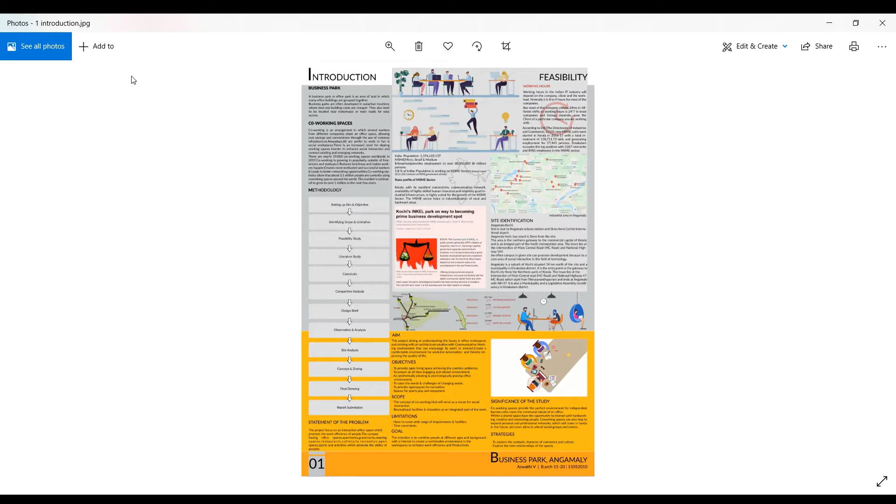Business park is an area of land in which many office buildings are grouped together. Business parks are often developed in suburban locations where land and building costs are cheaper, or places with easy access or transportation facilities.

Business park has great importance today because in India, 4 million people are working in IT sectors directly and indirectly, providing employment to more than 10 million people. The IT sector contributes 7.7% to India's GDP. 8 million people work in MSME sectors and most companies operate 24 by 7 in different shifts.

People working in IT professions are spending most of their time in offices.

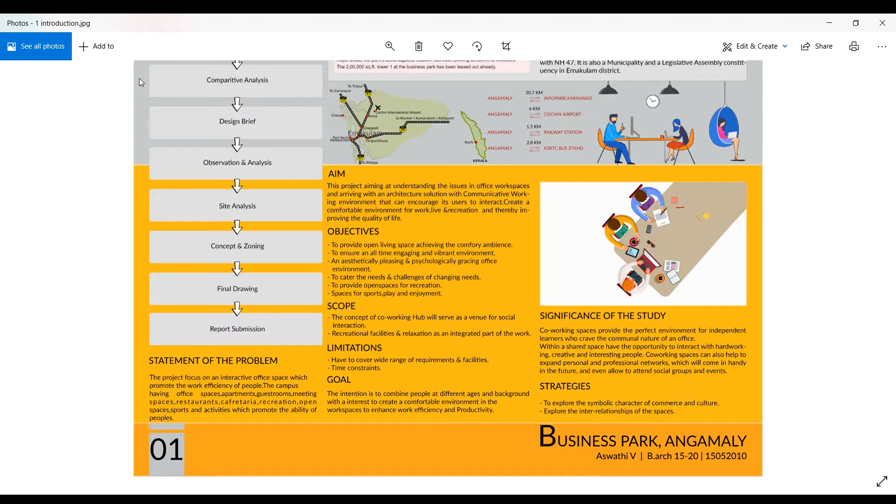This project aims at understanding the issues in office workspaces and arriving at an architectural solution with a communicative working environment that can encourage its users to interact, create a comfortable environment for work, live and recreation, and thereby improve the quality of life. The project is a live proposal for a business park in Angamaly by the state government for the development of the commercial sector.

The case studies I did are Titan Integrity Campus at Bengaluru and Lulu Cyber Tower 2 at Kakkanad as live case studies, and Suzlon One Earth at Pune and Googleplex California as literature case studies.

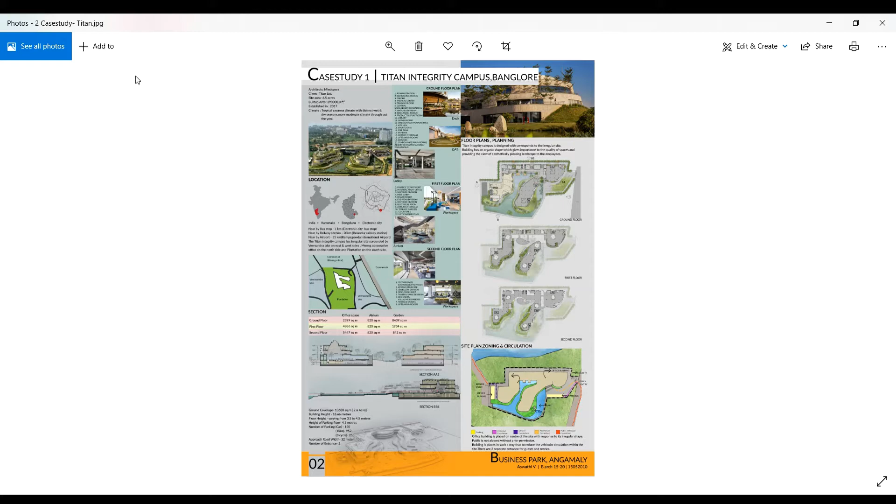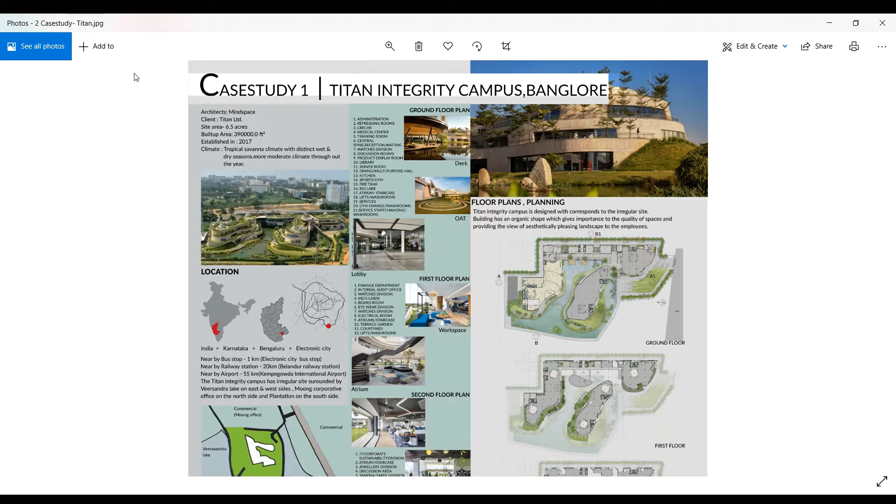Titan Integrity Campus is a three-story office building by Titan Limited with a total built-up area of 390,000 square feet in 6.5 acres, situated in Electronic City, Bengaluru. The main attraction of the project is the planning of office spaces on an irregular site with respect to nature, landscape and water body. The building is designed so that every floor has a terrace garden, with an atrium provided between office spaces for enough daylighting in interiors.

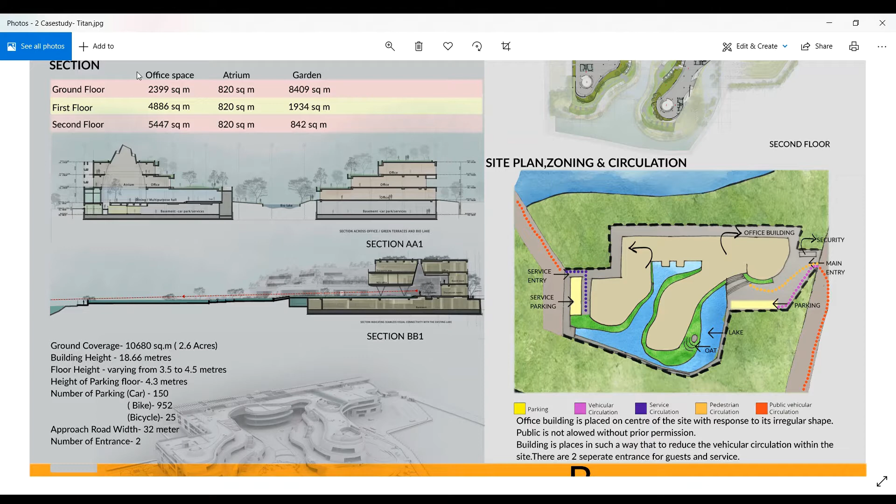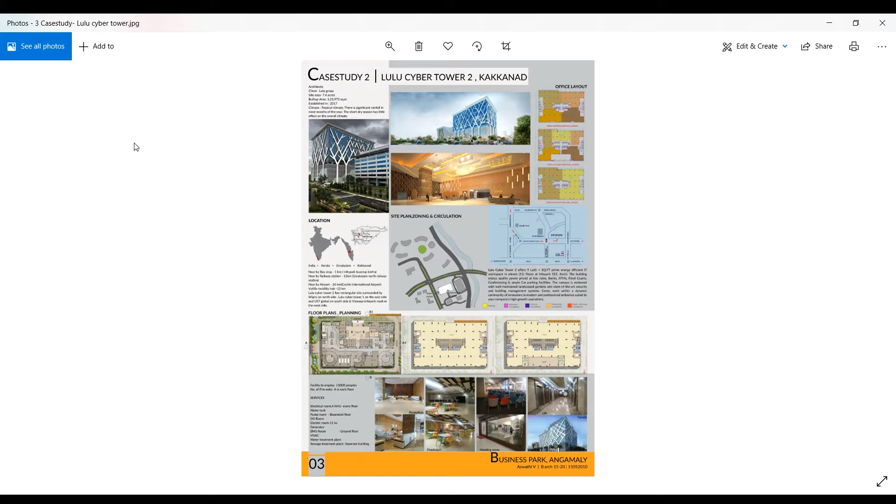The next one is Lulu Cyber Tower at Kakkanad. Lulu Cyber Tower 2 is a rental office building with a total built-up area of 1,35,900 square meters in 7.5 acres of site situated in Info Park, Kakkanad.

It is a 19-story building. The ground floor has a lobby, banks and parking. First floor to 8th floor is car parking area. 9th to 19th floor is office spaces. Services, lift and staircase are provided in the center, with office spaces on the periphery.

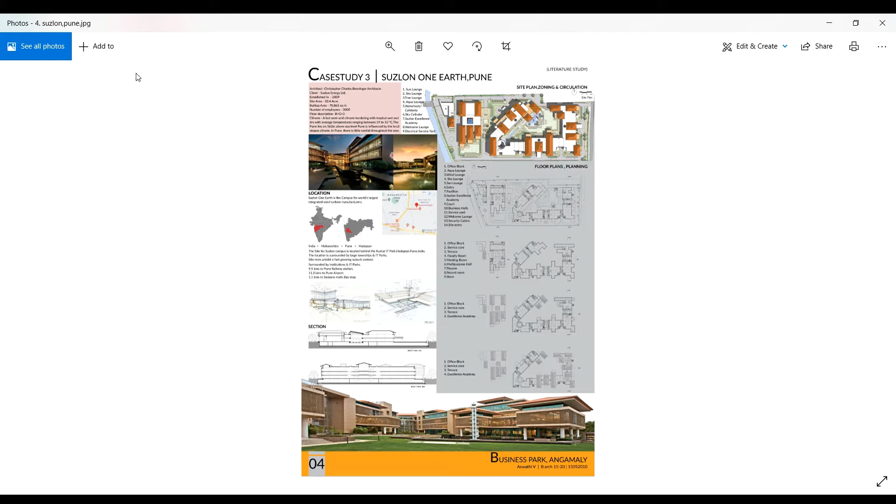Suzlon One Earth at Pune is a three-story office building by Suzlon Energy Limited with a total built-up area of 70,860 square meters on 10.5 acres, situated in Hadapsar, Pune. The entire project is designed with respect to nature and energy conservation. This is a LEED Platinum, GRIHA 5-star certified building, one of the greenest corporate campuses. The office building is divided into 5 interconnected individual buildings.

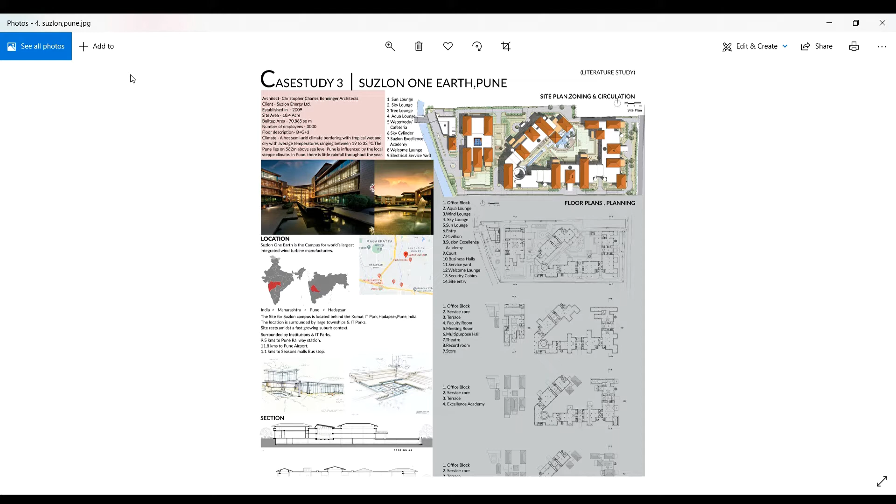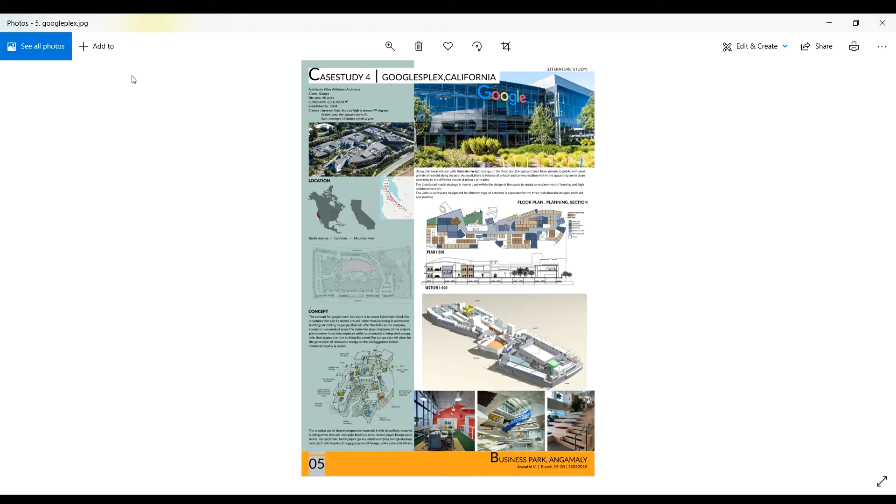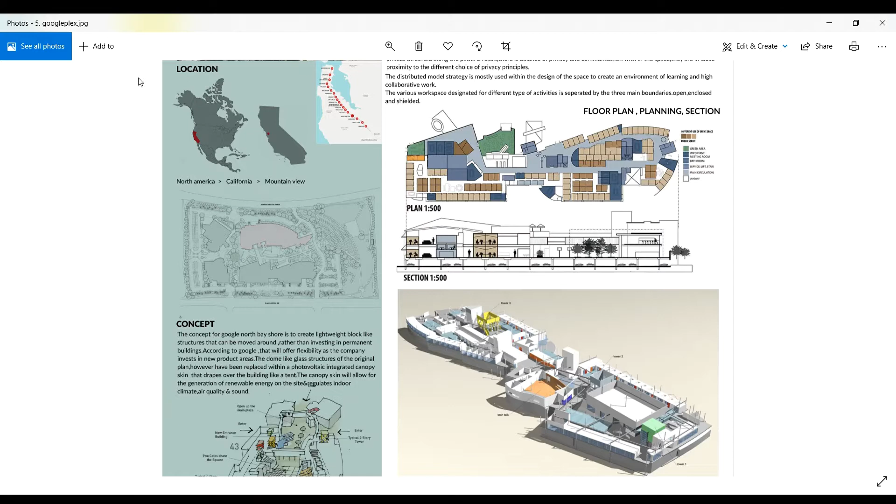Googleplex California is a two-story office building by Google with a built-up area of 20 lakh square feet on an 80-acre site situated in California, North America. The concept of the project is a lightweight, block-like structure with flexible working spaces. The canopy skin of the building regulates indoor climate, air quality and sound. The building gives importance to balancing privacy and communication within the space.

The main focus in the case studies was the type of office buildings, the quality of spaces, how they connect to the neighborhood, how they respond to nature, connectivity to spaces, light and ventilation, space distribution, and interaction of different spaces and employees.

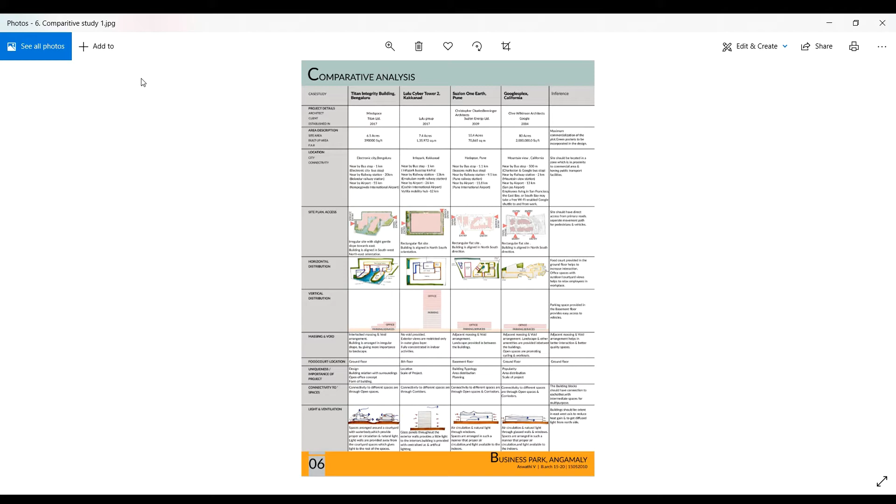The project is a live proposal for a business park at Angamaly. Angamaly is the entry point or gateway to Kochi town, lying at the intersection of MC Road and NH 544. The site has good access to public transport systems.

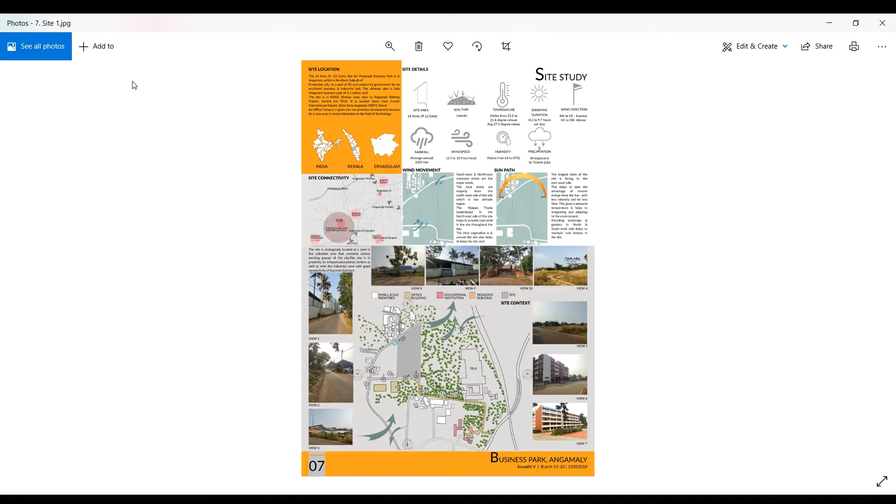The 14-acre 39-cent site is part of a 30-acre project by the government for a business and industrial hub. The site is in the KSIDC Startup Zone near Angamaly railway station, behind the TELK. It is located 5 kilometers from Cochin International Airport and 2 kilometers from the KSRTC bus stand.

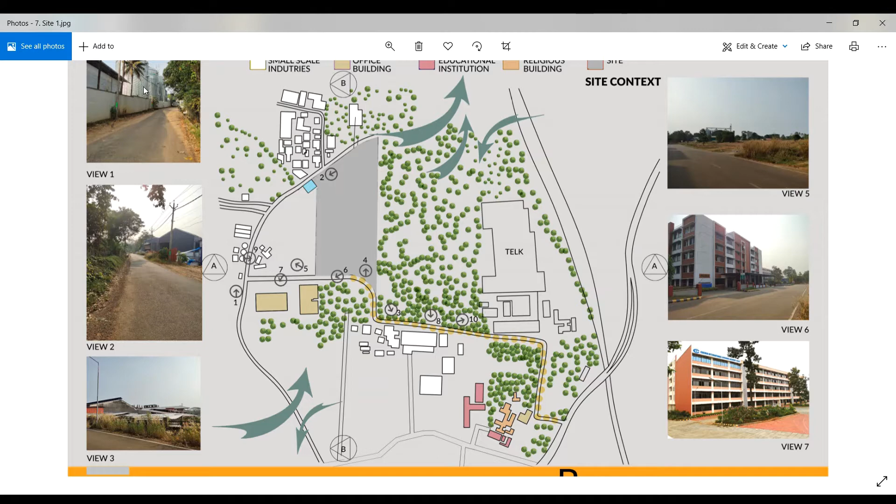An office campus in the given site can promote development because it's a core area of social interaction in the field of technology. This is the NH 544 road and here is the entry to the site.

The whole area is an industrial zone and here is the proposal for the business park. The whole project is 30 acres and here is our site, 14 acres and 39 cents. The site is surrounded by small-scale industries, office buildings and educational institutions, and here are small-scale industries and some institutional buildings.

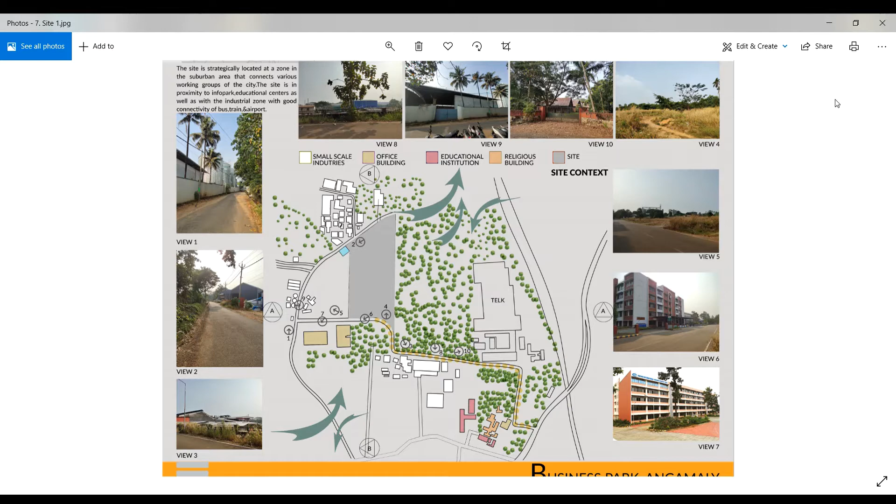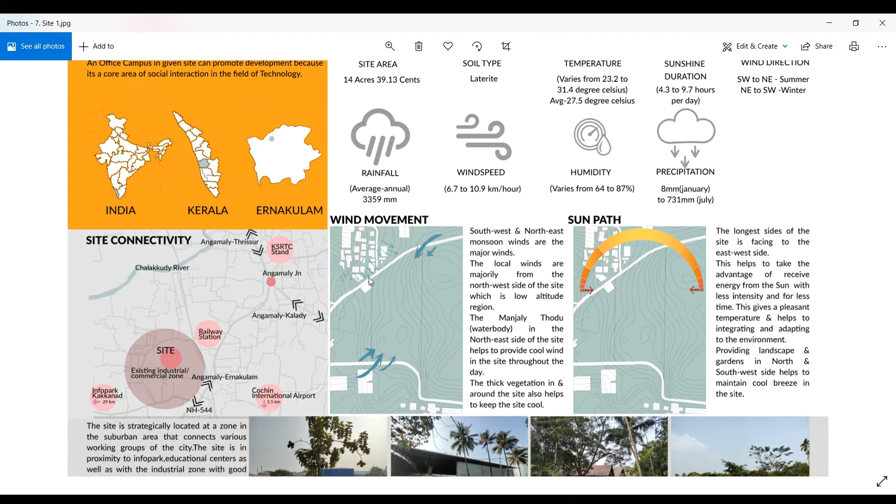The whole space is like a single campus, so the project should have access to the public as well as those working in this campus. This whole area is slightly contoured and the Manjaly Thodu flows on the north-east side of the site, so there is cool wind throughout the day.

The business park site is well connected by all means of transport: Cochin International Airport, railway station, and Kochi Metro, which will extend to Angamaly in the next stage. Manjaly Thodu, which flows nearby, was a major waterway.

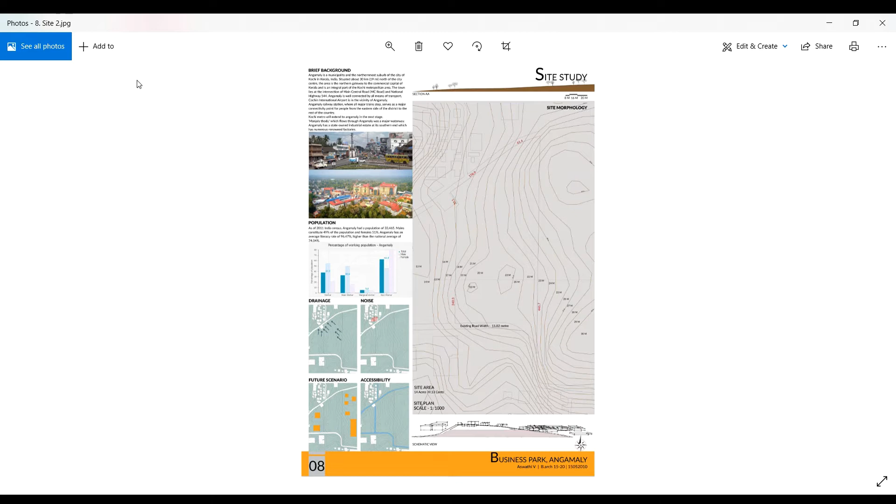The site has exposure to the main road and proximity to commercial and industrial zones. Here is the proposed industrial and commercial zone near the site, access to the site and nearby landmarks.

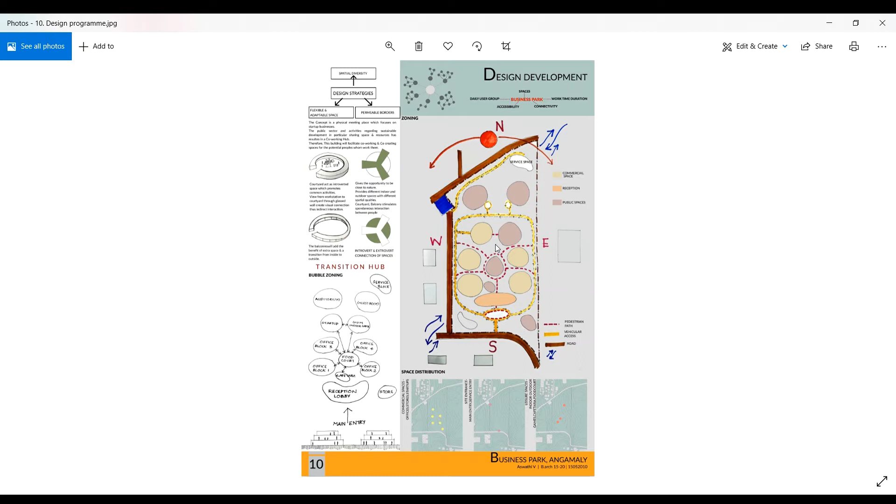The design of the business park depends on the spaces, work time duration, connectivity, accessibility and daily user group. As the project is part of another commercial campus and has access to the public, the design provides some spaces at the entrance and central core area, which can also be used by the public.

The round building allows greater flexibility in designing the interior spaces. Open floor plans of the building allow for easy flow of natural air circulation and lighting throughout. Here is the design evolution.

The central core is a space that has better opportunity to enhance the interaction of employees, thereby increasing knowledge and productivity.

Food court in the central core acts as the connectivity to different spaces and a space for communication. So the food court is provided in the central core of the business park.

The entrance of the business park should be welcoming, so the reception is provided near the gate.

The site is open to the public, so the store is provided near the front gate, and the cafeteria and food court are provided in the center core for easy access for the public.

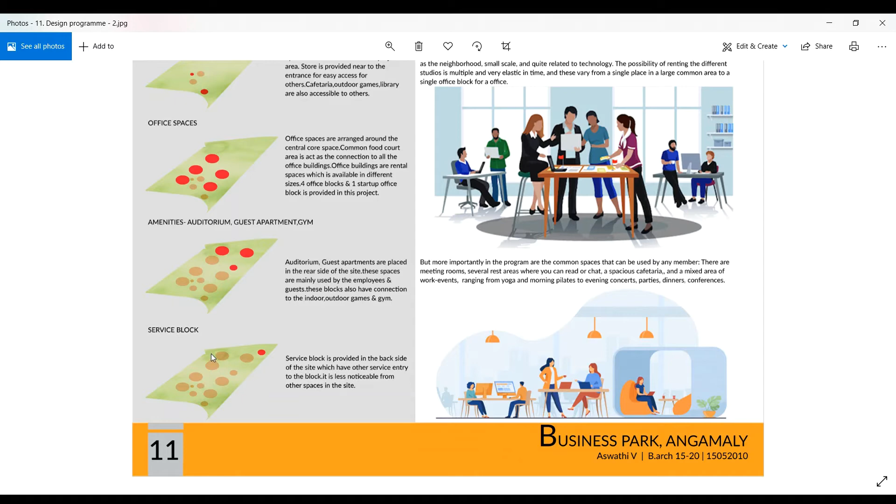The office spaces are arranged around the central core, and the guest room and auditorium are given at the back side of the site. The service block is provided at the back side of the site, which has other service entry to the block, and it is less noticeable from the other spaces in the site.

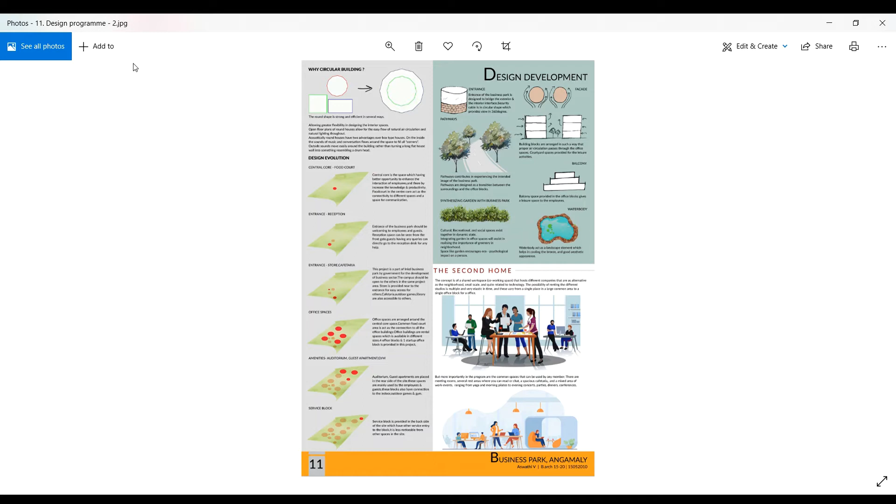The concept of the project is the second home. The concept is like a shared workspace for different companies, acting as an alternative neighborhood. The space provides meeting area, workplaces, cafeteria, conference rooms, etc.

This is the site layout. Here is the entry and this is the reception block. This is office block 1, 2, 3 and 4, and the food court is provided in the central core.

Here is one pavilion and the startup office. This block is for gym and indoor games. Here is the auditorium and the guest room, and the service block is provided on the rear side.

The total build-up area is 28,888 square meters. Building height provided is 12 meters.

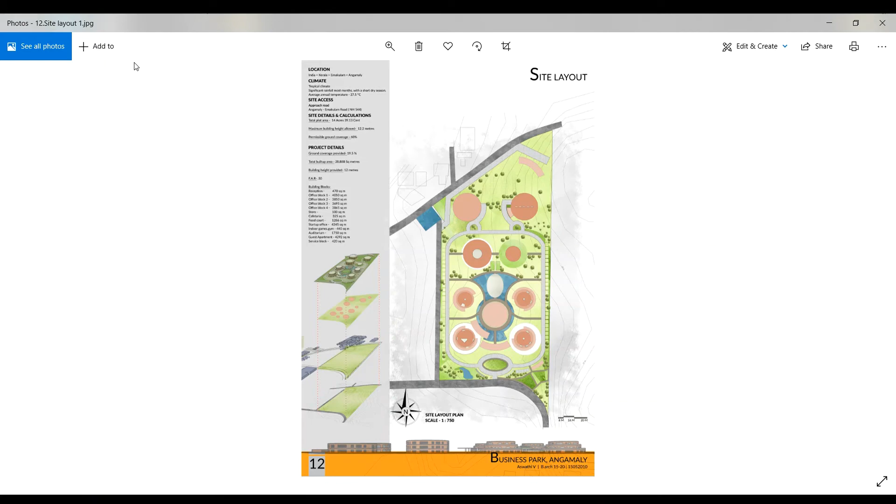A common food court is provided for the 4 office blocks and the startup office. This helps to improve the interaction between the employees and thereby helps in sharing of knowledge.

Gym and indoor games are provided near the central core. Employees can use their leisure time for physical activities to reduce stress. Common indoor and outdoor games also facilitate better interaction of employees.

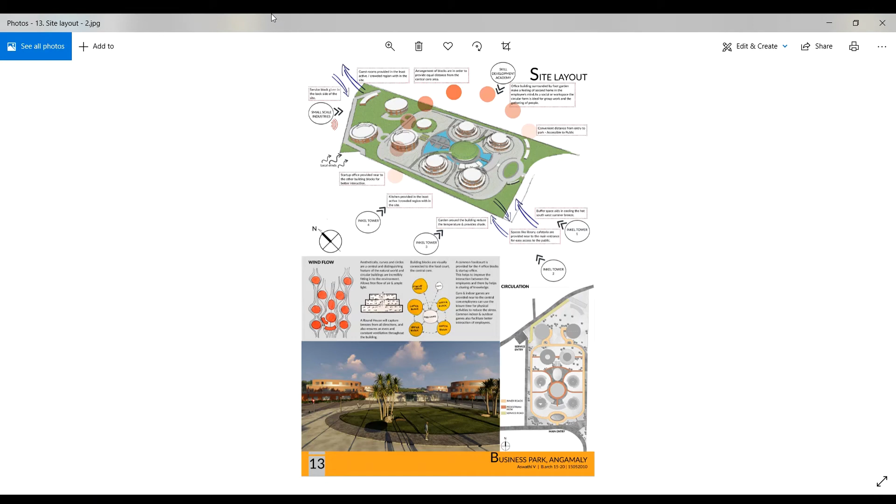The arrangement of blocks is done to provide equal distance from the central core area. Here is the master plan. The ground coverage is 19.5%.

The peripheral road is access for vehicles, and the inner road is only for pedestrians.

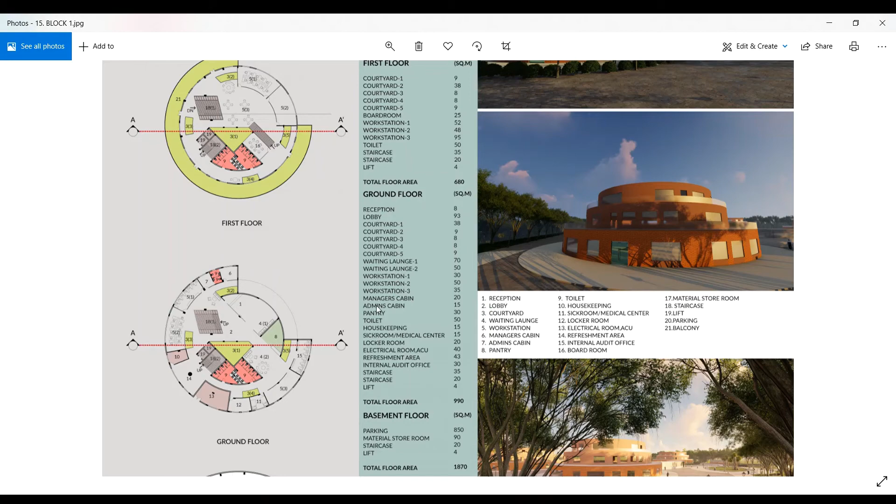The office block 1 has a total area of 4050 square meters. The whole building is a stepped structure, and a balcony is provided on each floor.

Here is the entrance to the block, reception, waiting lounge, and there is a central courtyard given.

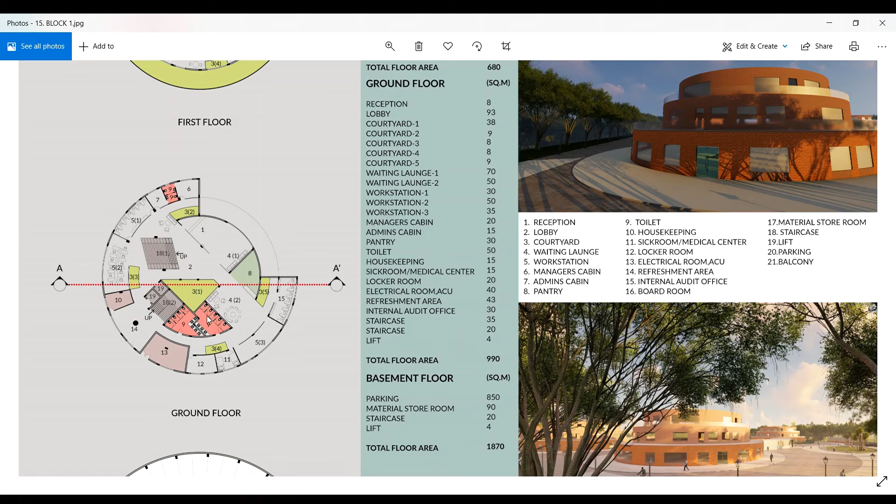The office spaces are provided in the periphery and the service spaces in the center, so that the office spaces get the view to the exterior and access to the balcony.

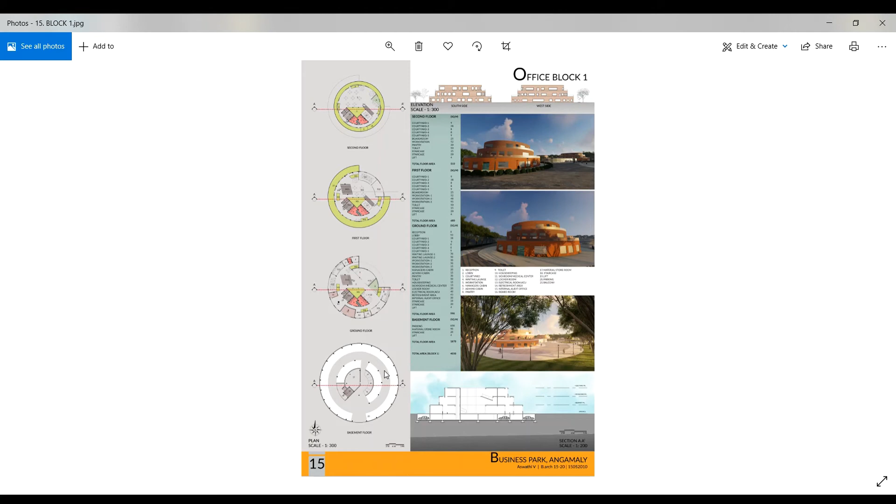60 car parking and 7 bike parking are provided in the basement floor. And here is office block 2.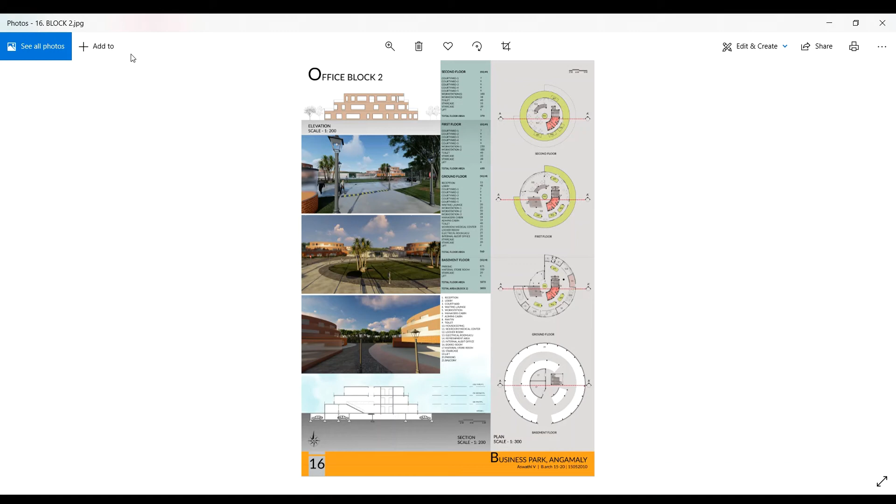The office blocks are provided with reception, lobby, courtyard, waiting lounge, workstation, managers and admin cabin, pantry, toilet, housekeeping, sick room, locker room, electrical room, refreshment area, internal audit office, boardroom, material storeroom, staircase, lift, parking and balcony.

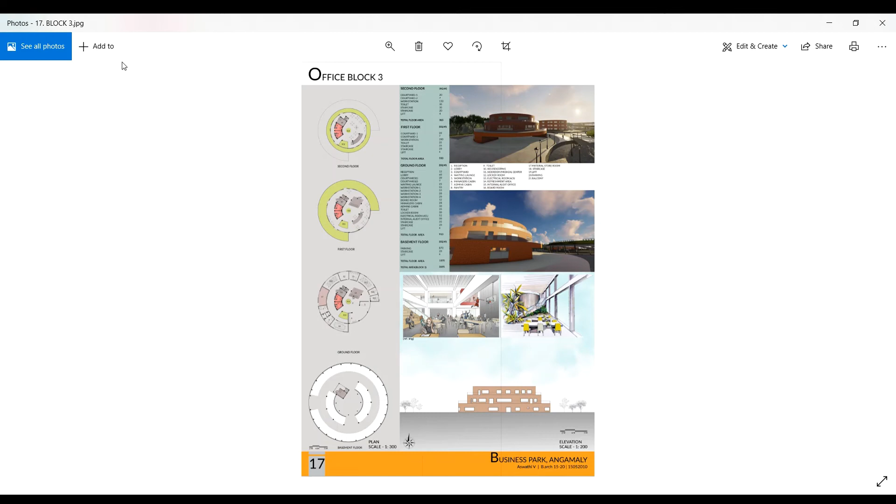Office block 3 has a total area of 3695, and office block 4 has a total area of 3865. The startup office is a three-story structure where the ground, first and second floors are equally contributed to the office spaces.

It's full of office spaces and unconventional lounges. The startup building has a total of 4,345 square feet area, which includes a central courtyard space, single work tables, group working tables, locker room, cafe, refreshment area and lounges.

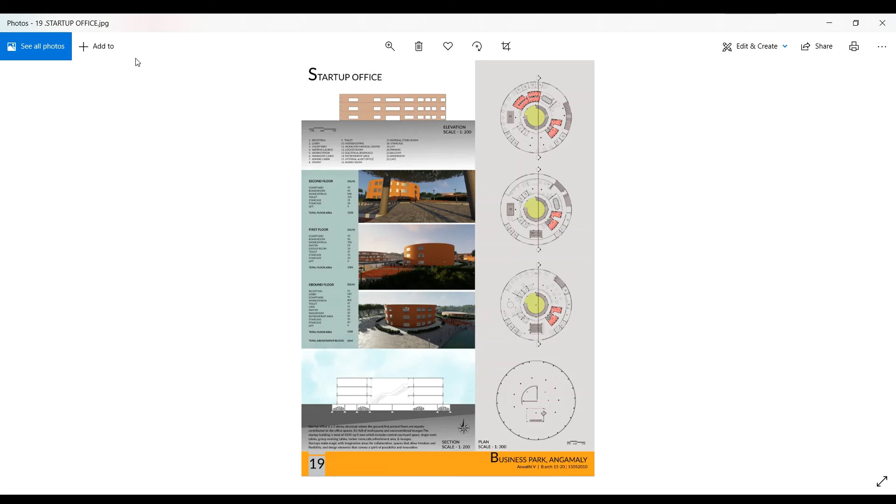Here the workspaces are arranged around the central courtyard. The guest apartment has a total area of 4292. The rooms are arranged on two sides of the corridor.

The auditorium has a total floor area of 1750 square meters. It is designed by ensuring that every audience member has the best view possible, with comfort and safety. A wide fan-type seating layout is provided to minimize the space between the audience and the stage.

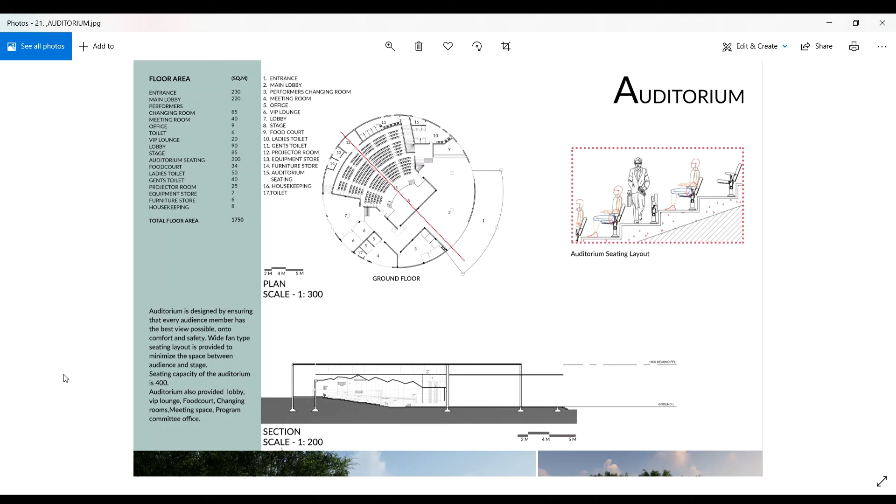Seating capacity of the auditorium is 400. The reception block has a total floor area of 470 square meters.

The reception is also provided with library, waiting lounge and lobby. The food court has a total floor area of 1286 square meters with a capacity of 200 seats.

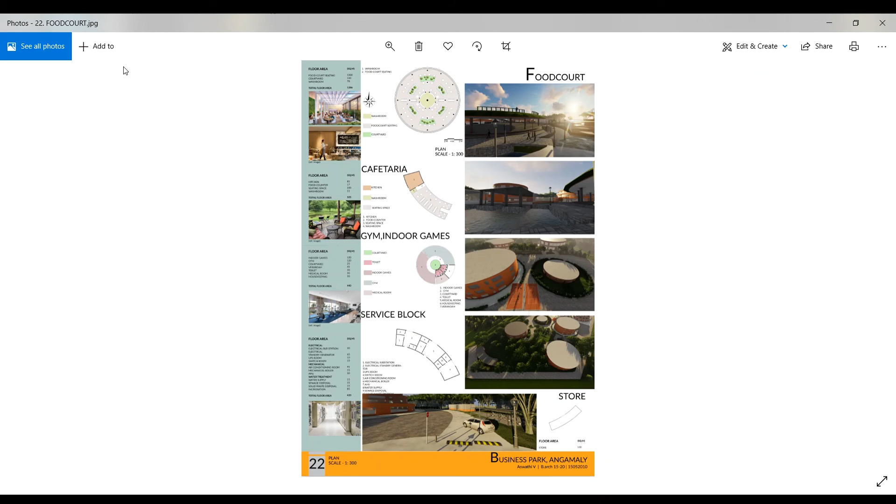The cafeteria has a total floor area of 325 square meters. There is a kitchen, food counter, seating space and washrooms provided with the cafeteria.

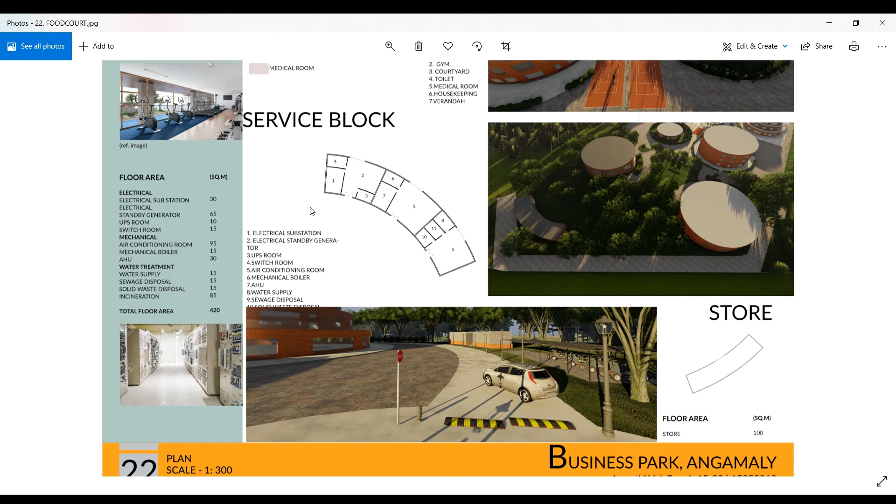The gym and indoor games area has a total floor area of 440 square meters. The service block has a total floor area of 420, and the special topic is co-working spaces.

The definition of co-working is when people assemble in a neutral space to work independently on different projects, or in groups on the same projects.

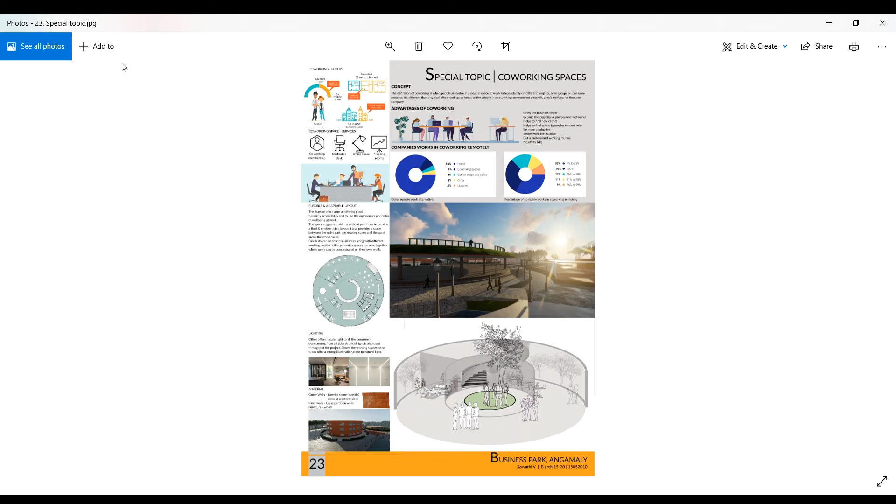It's different from a typical office workspace because the people in a co-working environment generally are not working for the same company. The startup office aims at offering good flexibility, accessibility, and using the ergonomics principles of well-being at work.

The space suggests divisions without partitions to provide a fluid and unobstructed layout. It also provides a space between the noisy part, the relaxing space, and the quiet areas, the workspaces.

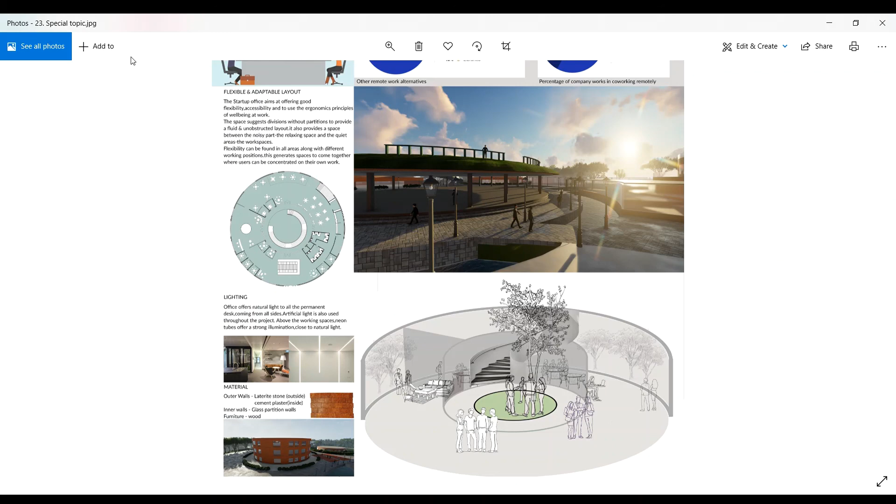The spaces to be provided in the co-working spaces are casual meeting area, different work styles, kitchen, pantry spaces, and space for play or relaxation.

They have more job control. Co-working spaces are normally accessible 24 by 7.

People can decide whether to put in a long day when they have a deadline or want to show progress, or can decide to take a long break in the middle of the day to go to the gym. They can choose whether they want to work in a quiet space so they can focus, or in a more collaborative space with shared tables where interaction is encouraged.